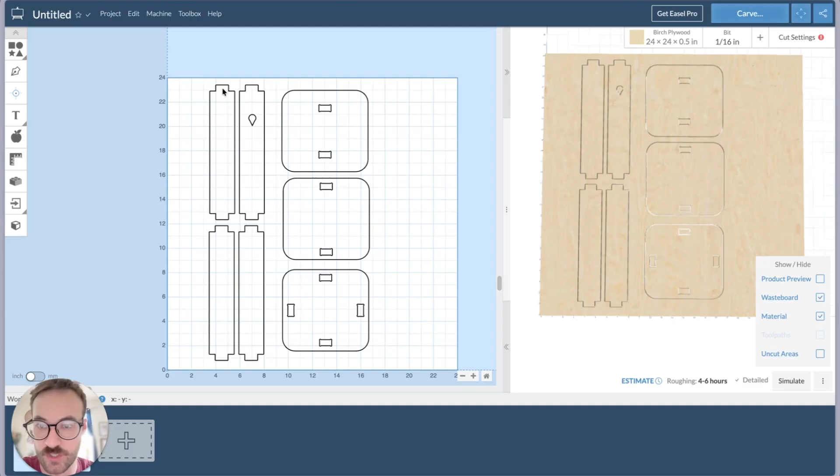And then, since I'm cutting the bases out of the same material, ideally these notches are going to be half an inch long, and I'll be able to slot them in there without issue. But we're going to use the measurement tool to confirm that. So to start, we're just going to kind of get a closer look here.

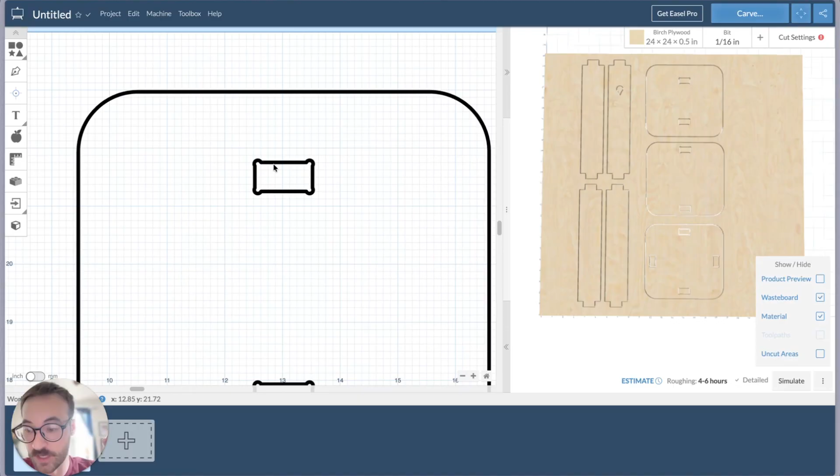I've got these notches here. They've got dog bones in them because if I were to cut them out at this size, Easel would give them rounded corners, so those dog bones help make sure that the thing that I'm cutting is going to fit as snugly as possible, while also allowing me to keep the kind of sharp corners of my pillars.

So to start, I just want to confirm that this is 1 inch wide, and if I click on the object, we can see that it says that the width is 2 inches and the height is 11 inches, but I can't really confirm what this distance is here. So I'm going to select the measurement tool here, which is this ruler icon on the left-hand toolbar. When I select it, you'll see that my mouse icon turns to a plus sign.

And so when I bring it over, you can see it's butting up against that inside edge. And that's because I have it set to cut outside shape path. So the inside edge here is the outside edge of the object that's going to be cut out. And so this is the dimension that I'm trying to pick up.

And you can see as I'm moving my mouse there, it's butting up against that cut line. And that magenta circle means that it's locked onto that line. If I gently move it away, it disappears and I can set my point wherever. But I want to set it right on here. And when I click on that, it sets a point right on that cut line.

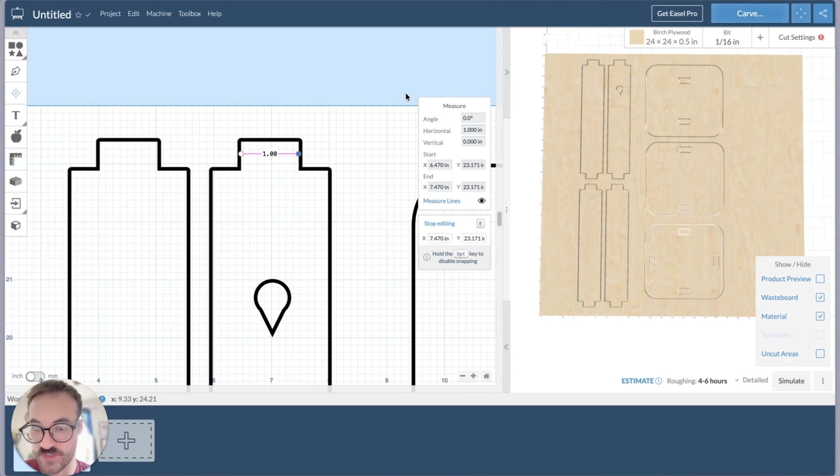And then as I move my mouse over, I can kind of increase that distance of my measurement line, and then eventually when I get to the other end, it's going to butt up against that other interior edge of my design and create a measurement. And I can see that that measurement shows that it's 1 inch, which is exactly what I'm looking for, because that means it's going to fit into these notches that I've designed here.

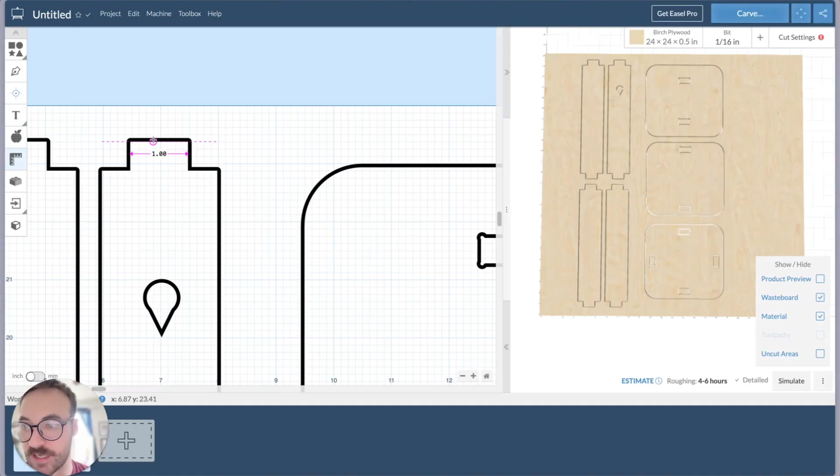So what I'm going to do is I'm going to take my measurement, and instead I'm going to kind of bring it over here, and it's going to butt up to this magenta dotted line.

And essentially that magenta dotted line is an extension of this interior line, but it's extending it out, so I can pick up that measurement point outside of the barrier of my object, or the barrier of my design. I can still pick up that measurement, so I can confirm that everything's working as it should.

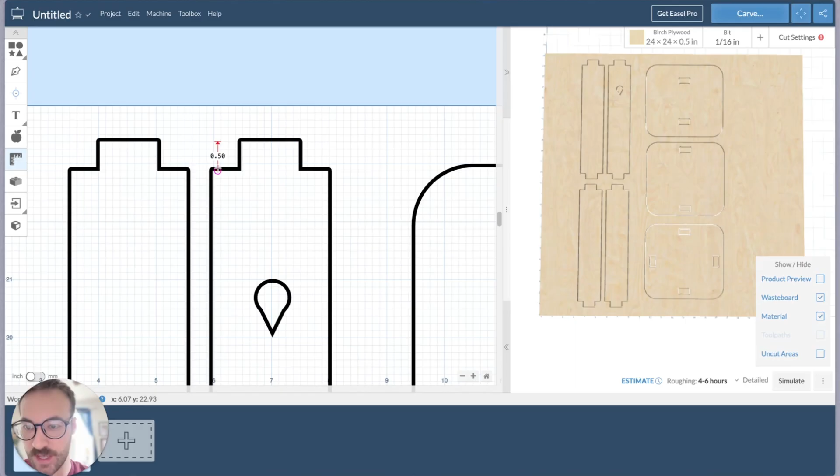So I'm going to go ahead and select that point and then drag it down and connect it to this point here, which is that other edge that I'm looking for to confirm that that's going to be half an inch, which it is. And this works really well too for anything, including the other direction here. I can pick it up, and this line extends out in this direction as well on the y-axis, and I can move it over and catch that measurement too. I know it's 2 inches wide, but that's just another utilization of that specific feature.

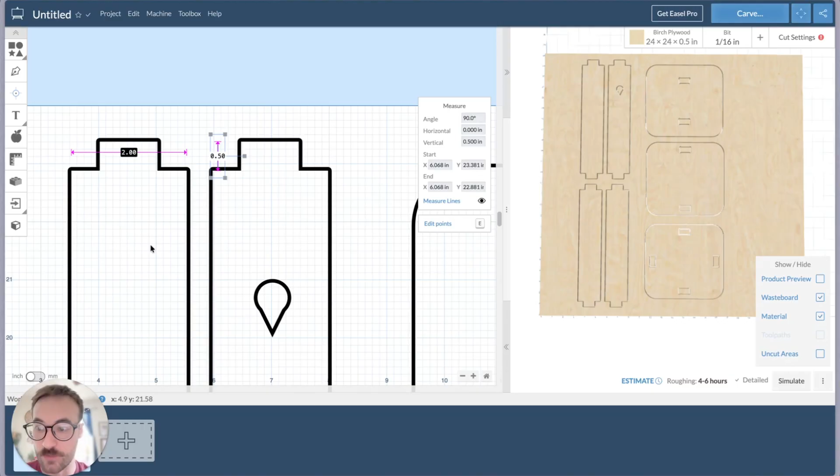One thing to note really quickly is I've got this little design component here. This is for something that I can store cables in, so they'll move in through the wider area and then they can rest in this V shape here. One thing to note is as you're picking up measurements, where those measurements lock to on that line is based on your cut path.

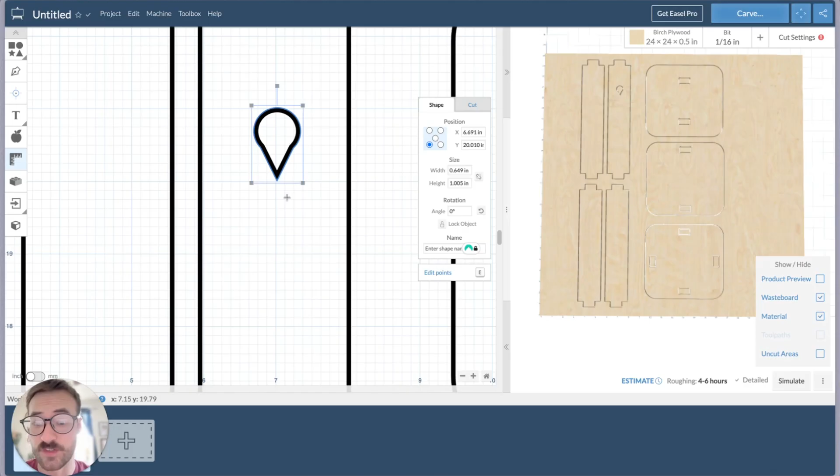So this, unlike this exterior object, this object is set to cut inside shape path. So where it butts up to is actually on the cut path for this object, which is on the outside edge of this object, as opposed to this object where it's on the inside edge. So that's something to keep in mind as you're picking up measurements. If your cut path is incorrect, you might see inconsistent measurements, and that's something to be aware of.

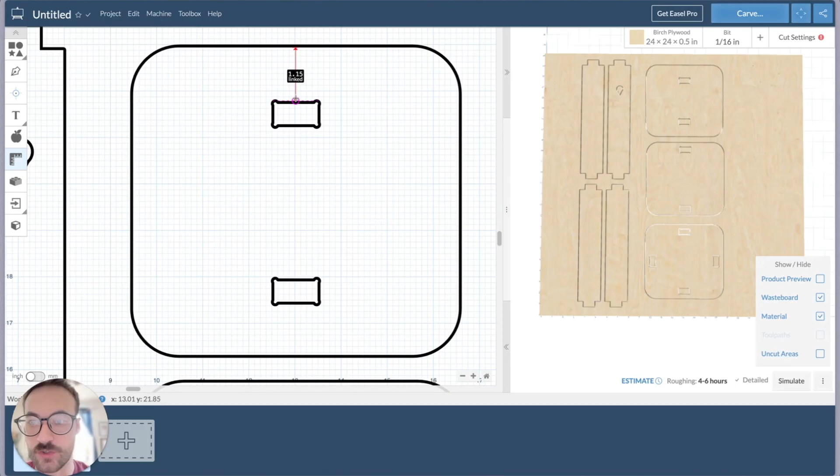One more thing that I want to do here really quick is I've got these notches right here for my base, and a problem that I've got is I want them to be consistent at about 0.45, or just a little under half an inch, from the edge of this base. And we can see that that's probably not likely in this scenario. So what I can do is grab my measurement tool and pick up again that line from the interior line of my design, and I can drag it and link it to this notch cutout.

And once I've linked it to this notch cutout, if I change the dimensions of this notch and where it's located on my object, that measurement line is going to update dynamically. And so I can use that to confirm that I'm exactly where I need to be, which is 0.45 away from the edge of my base. I can do that by either grabbing the object and dragging it, or you can use the arrow keys to move it more incrementally, which allows for a more consistent and precise movement. And I'm going to do that here on the other side as well.

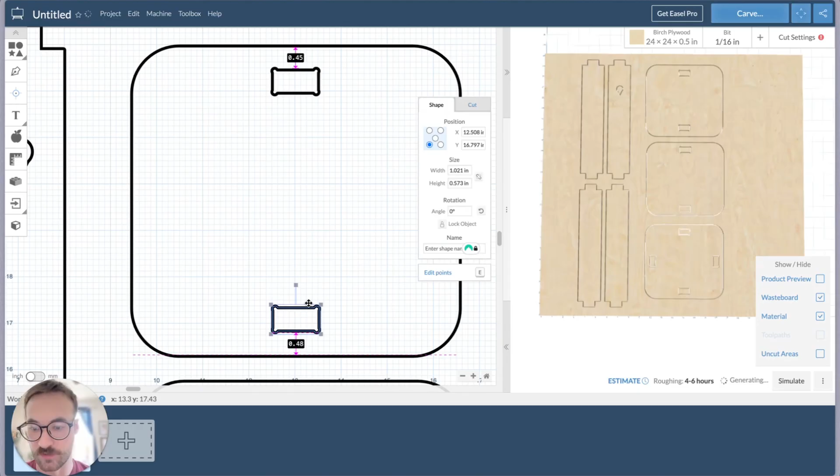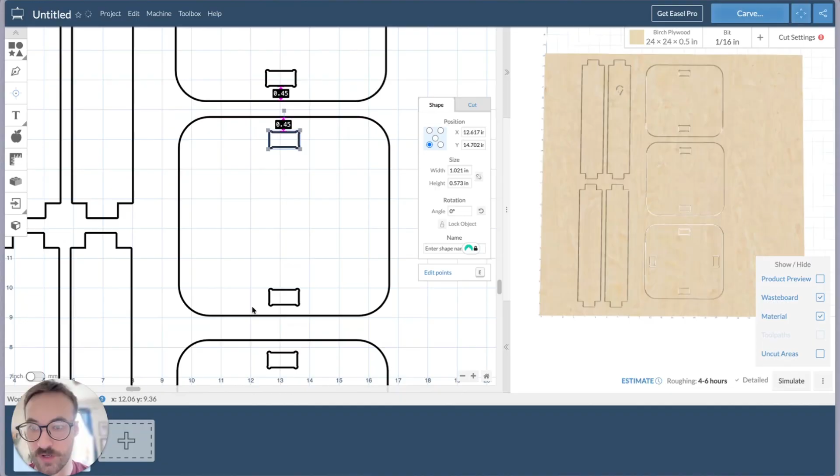And I'll just select my object and move it down. If you hold the arrow key, it's going to move a little bit faster. And then you can do the last couple individual strokes of the key separately. But now I've got that measurement consistent on either side, which is really helpful as I'm designing this. And I'll have to go through and change these as well. But it's really simple. You just butt it up against that line, bring it over and link it to that line. And then I can change that dimension very easily to be consistent across the board as I'm moving through with my design. And that's a little bit more about the Easel Measurement Tool.